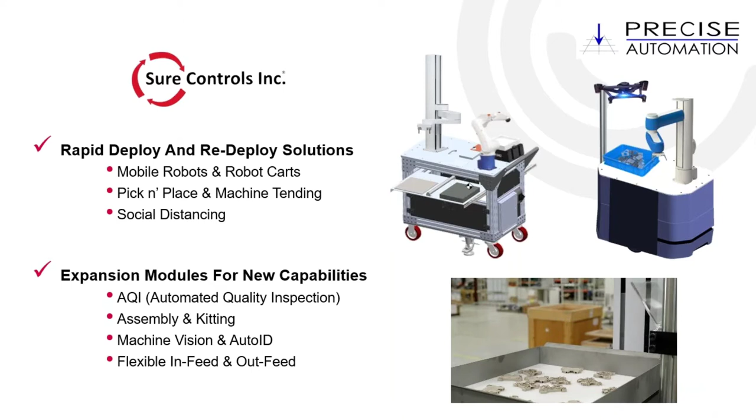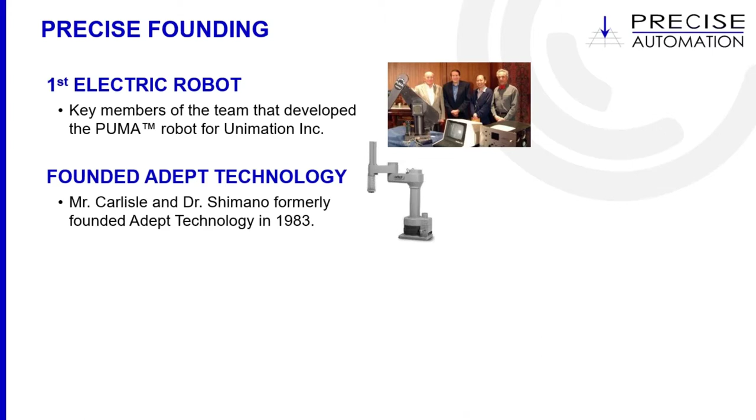They were out of Stanford University. After that project, the robot was sold to a company called Unimation, and the two gentlemen decided to continue to work together, founding a company called Adept Technology. Adept Technology set the benchmark of excellence for SCARA designed robots, high-speed SCARA with safety fences, mainly in assembly automation and big automotive plants and many different industries.

They sold that company back in 2015 to a company called Omron, and then they founded Precise Automation in 2004. Precise Automation is located in Fremont, California, right down the street from Tesla. The team's been together for over 20 years.

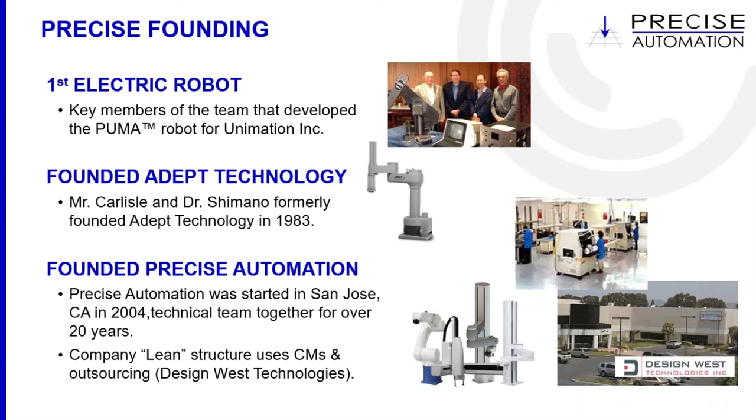It's a lean company. We're actually one of the few companies that manufacture robots within the United States. We do that through contract manufacturing with a defense contractor called Design West down in Tustin, California, in Orange County. This allows us to have pretty decent lead times on Cobots. Cobots is really the only robot technology we develop besides our motion controls. We do not develop industrial robots.

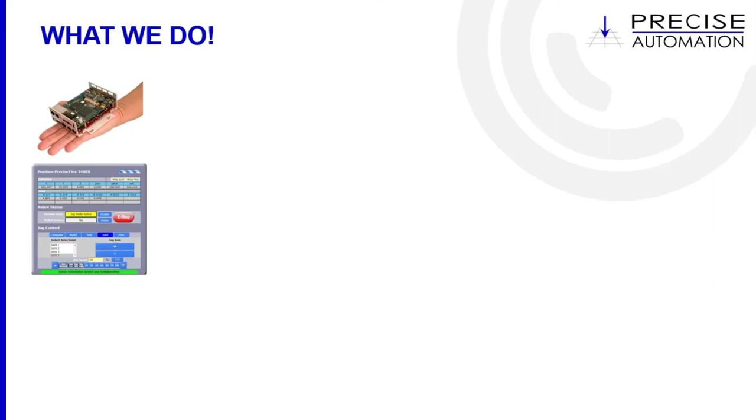Moving to what we basically do, the company started out with a controller design, a microcontroller design, very powerful, running on low voltages, that could power kinematics or precision machines by design. That's exactly what they did after having that design and software. They said, why don't we go ahead and develop a Cartesian type robot?

So we have the Precise Place 100 series of Cobot, in either an XZ or XYZ configuration. The controllers are embedded in them, so you don't have cables hanging out the back going to a big tower box and then into the power. Very clean and very easy to install, and they run off of 110 voltage. Those are primarily used in lane changing for conveyor systems and some simple pick and place applications for tabletops.

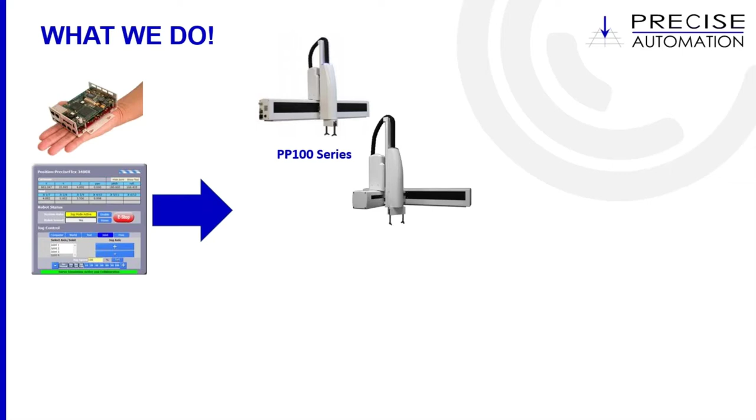We went ahead and designed this unique SCARA design robot with the PF400 and 3400 series. Both units can be placed on a collaborative rail that we offer in 1 meter, 1.5 meter, and 2 meter lengths. This is a unique design compared to other SCARA type robots. Traditional industrial SCARA designs have the Z stroke out in the front, limited most of the time to a 200 to 220 millimeter stroke. Our strokes are in the back, as you can see in these pictures, the two black lines on the back column. We offer this Cobot in 3 different lengths: 400 millimeters, 750 millimeters, and the tallest at 1160 millimeters. So these are very unique designs.

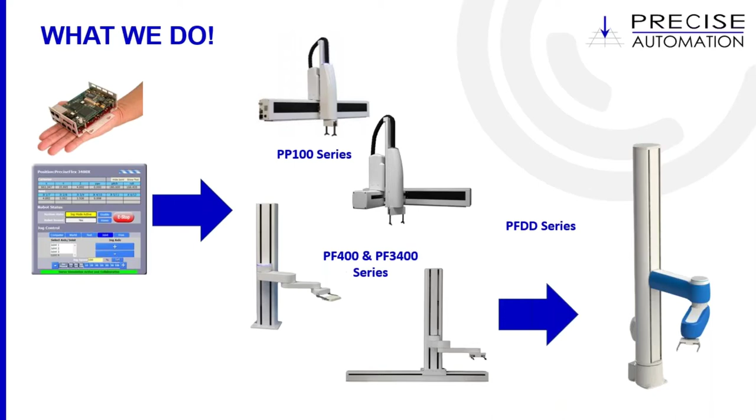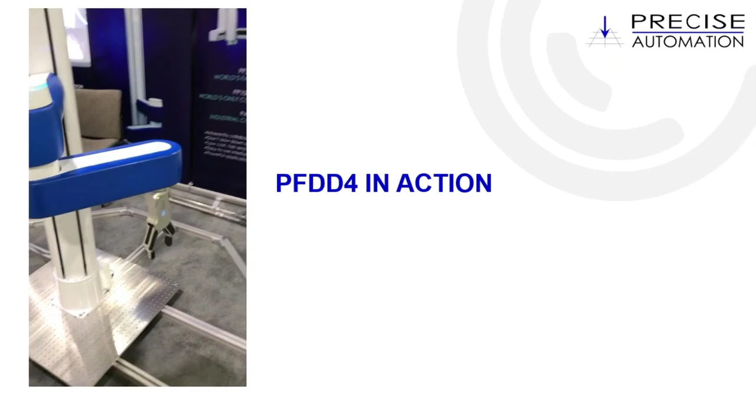We're going to get more into the applications with them, but our newest product about to be released is the Precise Flex Direct Drive Series Cobot. This incorporates design from traditional 6-axis Cobots as well as our SCARA design. Instead of a linear rail, we have a rotational base direct drive motor, and then a direct drive out on the elbow. You can see it here from a show we did earlier this year demonstrating this new Cobot, and it has a unique envelope.

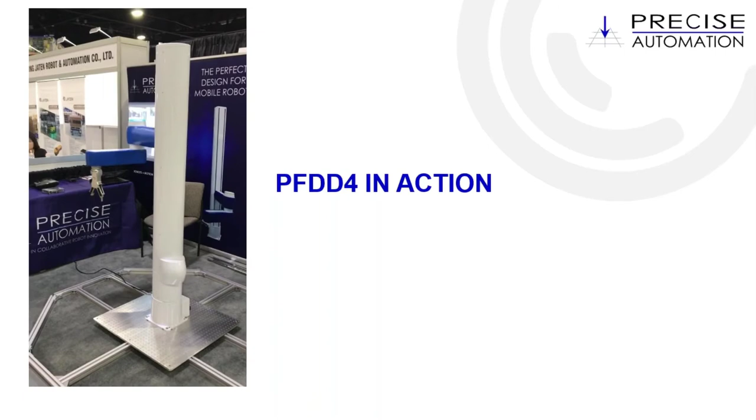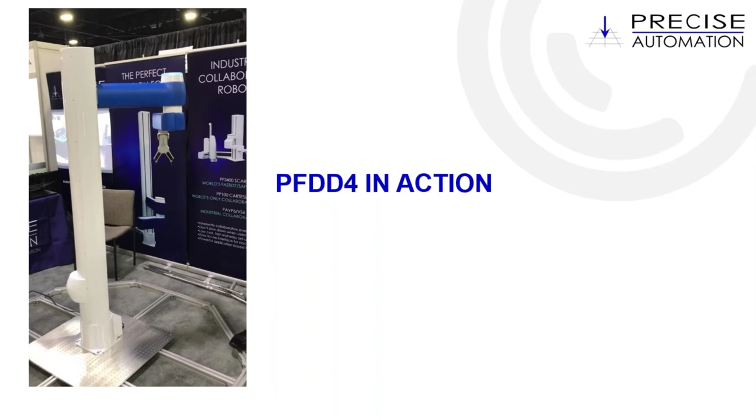This one is offered in a 500 millimeter Z stroke, a 1 meter Z stroke, and a 1460 millimeter Z stroke. It comes in either a 4-axis, which this one pictured is, with a gripper on the end — you could call that a 5th axis — and it's also offered in a 6-axis version. This unique design will be very good for machine tending applications or infeed/outfeed loading of conveyor systems.

One of the questions I get asked most frequently when I visit customers is, what is a collaborative robot? Some folks still don't truly understand the utilization and the definition of collaborative.

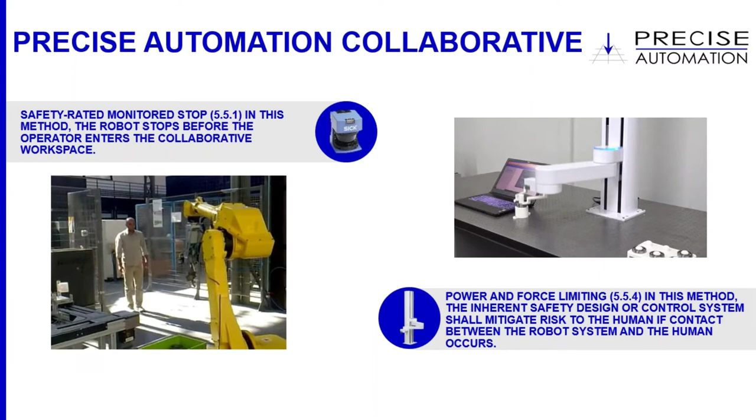If you look at this traditional design, it was first collaborative but actually utilizing an industrial grade robot that used a LiDAR area scanner. As the operator would walk towards the robot, it would slow down and then come to a complete stop. He would then do what he needed to do within the work area, and once he's done checking everything, he leaves the zone. As he leaves, the robot slowly comes back to working and goes back to what it was doing.

Now, I don't call this fully collaborative. I call this semi-collaborative, because the operator is not working with the Cobot at the same time.

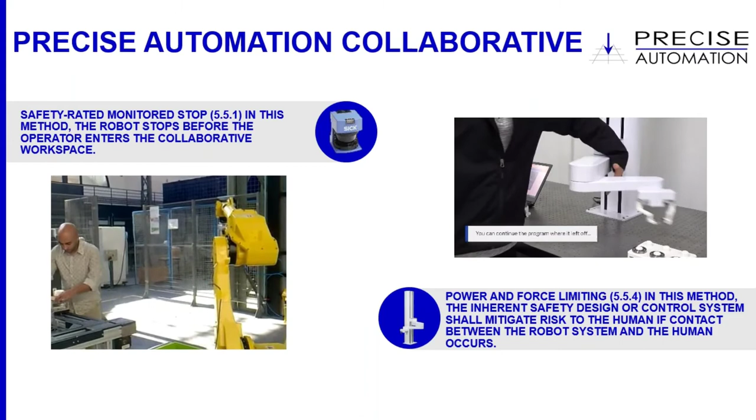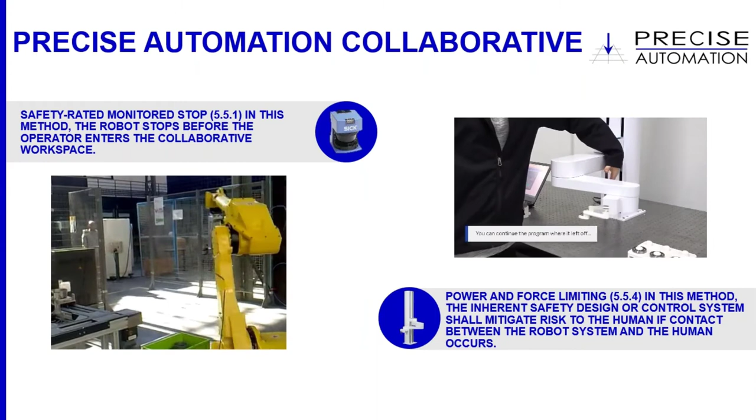So what we call collaborative is shown in the upper right here. You can see Dalton put his hand in between the pinch point, and it stops the Cobot, then the Cobot goes back to working and doing what it's doing. Our Cobots are all force limited, and they all follow the stringent guidelines set by the ISO safety standards.

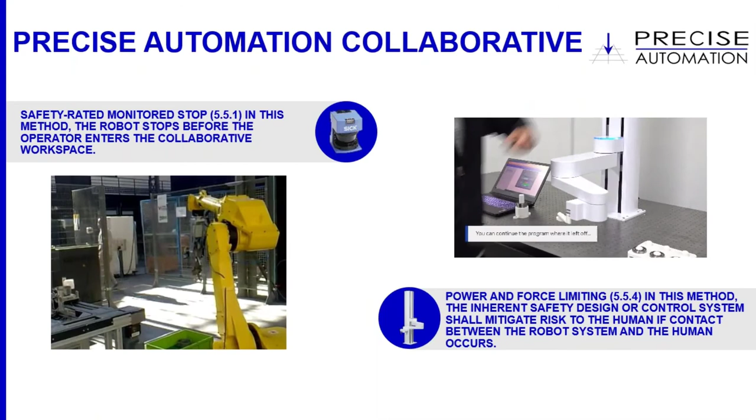With that, I'm going to hand it over to Dalton to talk about teaching.

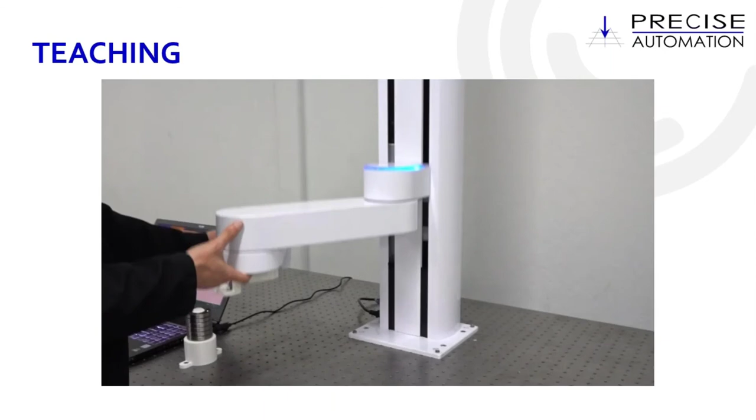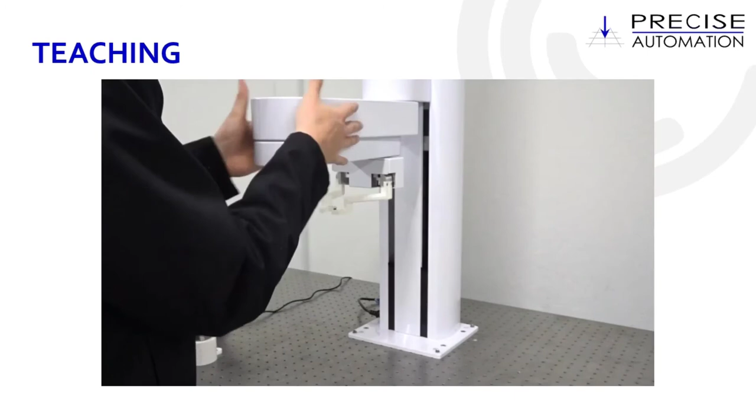Thanks, Darren. I'm going to talk about a unique feature for our line of robots, specifically the PF3400 seen here, and that's how easy it is to drive these things by hand and manually teach the positions. Unlike other industrial robots like Darren showed earlier, or other Cobots on the market, in our mechanical selection we don't actually use typical high friction, high gear ratio components like gearboxes and harmonic drives.

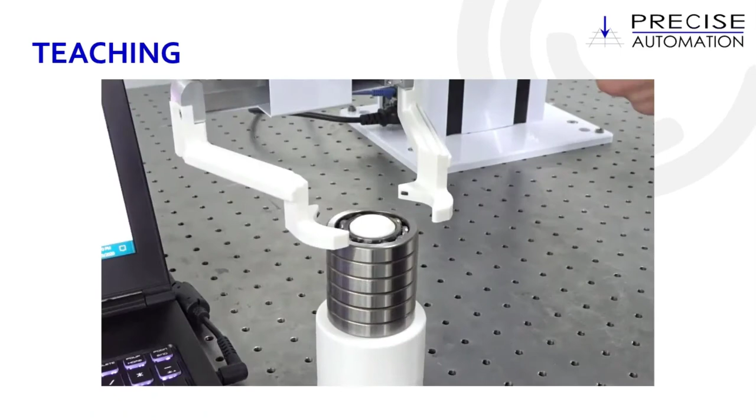This serves a few purposes for us. It produces a small reflected inertia, and mechanically what that allows us to do is be really sensitive with our current sensing technology, allowing us to detect collisions and make our robots more safe and sensitive to the outside world. It also allows us to move at the fastest collaborative speeds, at 1.5 meters per second.

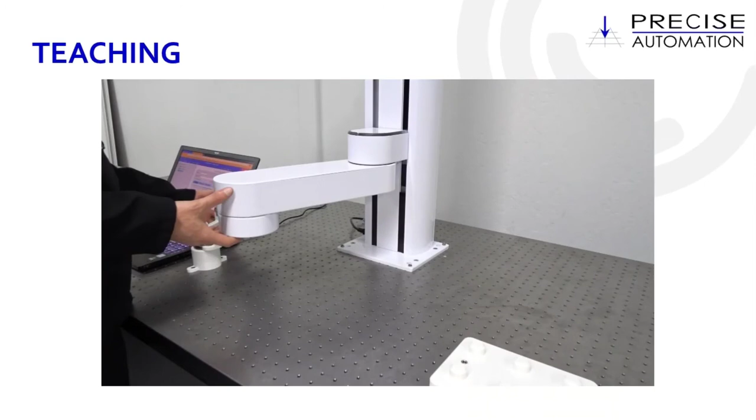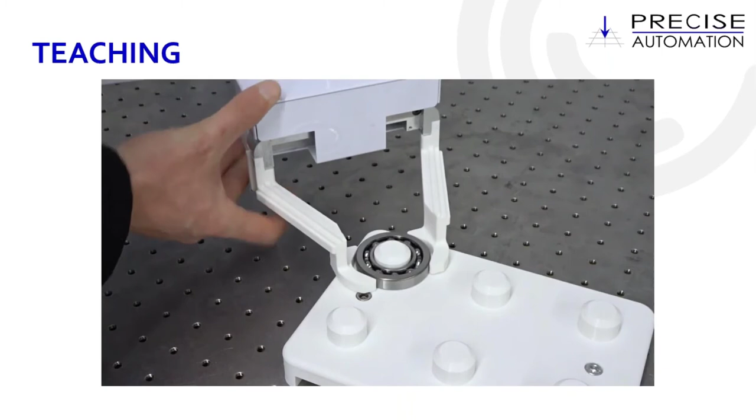What you're seeing me do here is use our graphical user interface Guidance Motion to simply click around a few times on the screen, teach a few positions, put the robot into free mode, move it to a specific location you want, and then with just a few more clicks, you can get a very simple pick and place application up and running in no time.

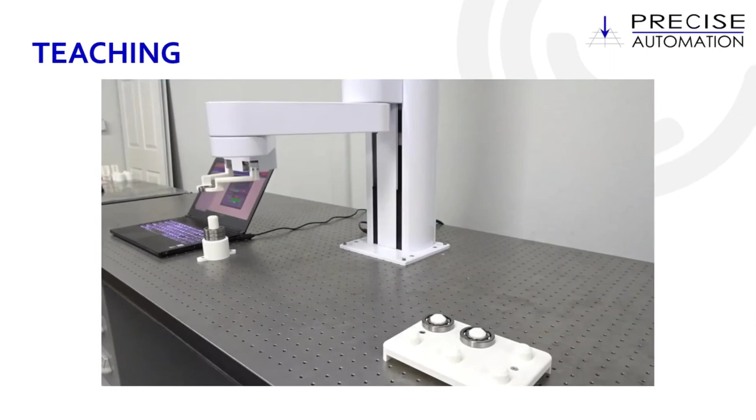We have a fully integrated 48-volt motor supply, which for typical use with these robots means they consume less than 200 watts on average operation. So they're really lean and really green, really nice.

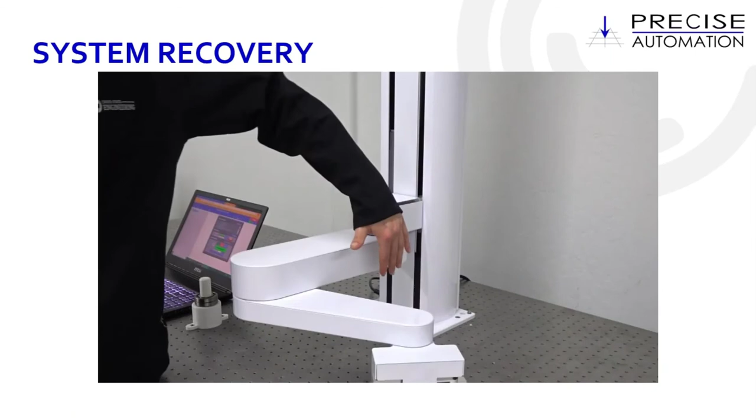Next video, please. Another unique feature we like to demonstrate is the power of our error recovery and the low collision forces of our Cobots. It's what makes us uniquely collaborative, and we always opt to show this famous pinch point demonstration. With other systems, you're going to get alarms raised on the factory floor, downtime in the work cell, and more importantly, an injured operator.

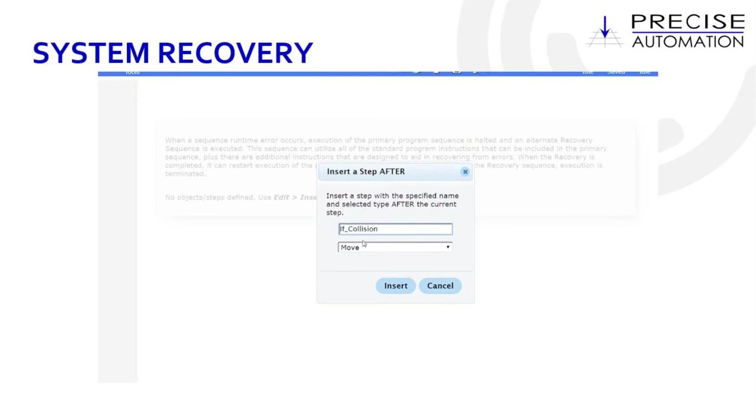But with our error recovery system, simply through guidance motion as seen here, we can allow for obstacle avoidance, jammed parts, as well as missing parts, and get the robot to recover from these errors and continue execution of the application with no attendance needed in the work cell. All of our collision testing has been performed and certified by TUV, and all of our collision speeds and forces are provided in our hardware reference manuals published for your reference.

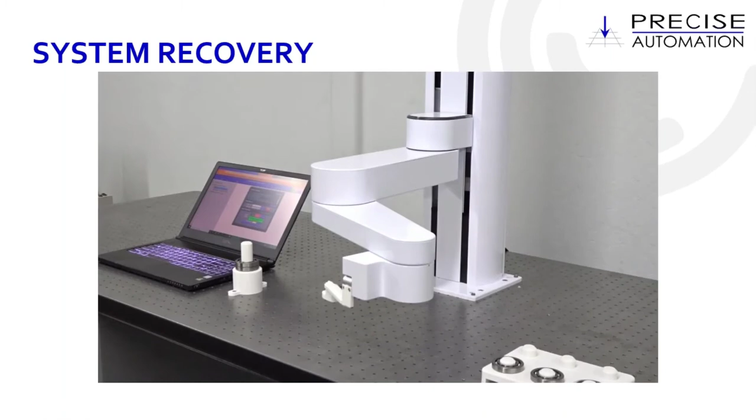So what you're seeing here is just one type of collision in the work cell. It's going to make a few checks and go back to doing what it was doing.

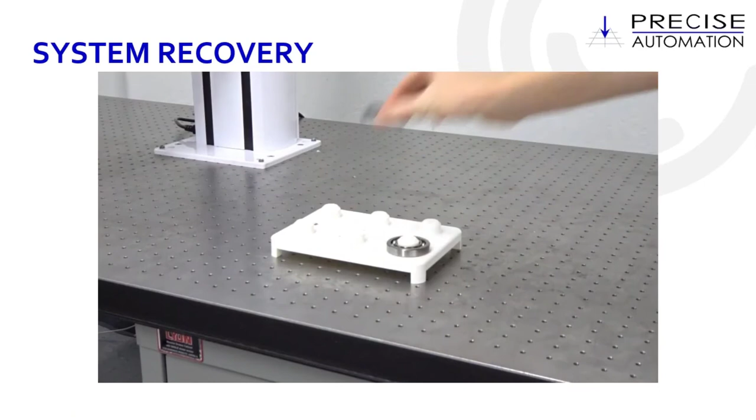Inconsistent part presentation might be an issue for some assembly lines in-feed or out-feed, but you can see here with an already existing recovery routine, we can add in a part presentation system check, and then the robot will continually look for that part.

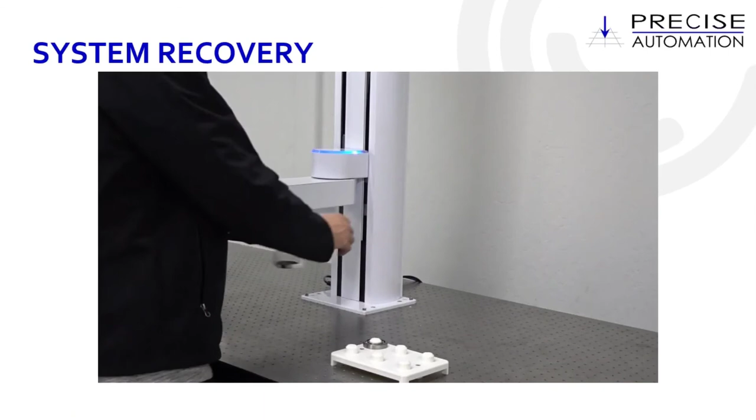And then lastly, here is another example showing an operator perhaps in the work cell, and if some type of collision happens, we can give the Cobot or the operator some time to go ahead and manually adjust the Cobot, put it into a position to avoid, say, some other expensive hardware components, and then the robot will get back to doing what it was doing.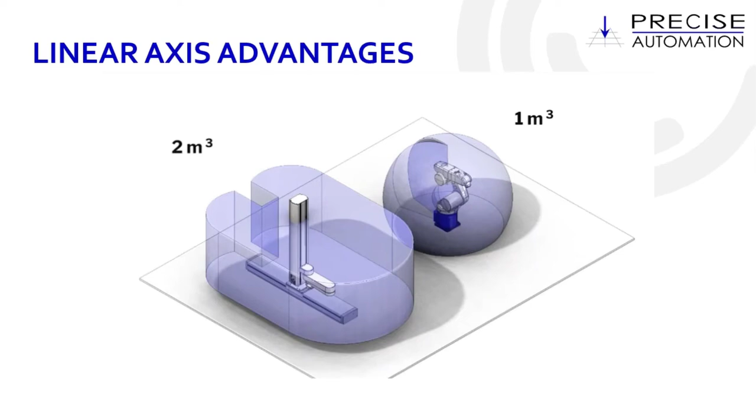And lastly, one thing we like to talk about is the advantages for maybe an additional axis, or we call the linear axis. And so we always show this visualization here of the traditional 6-axis work envelope. It's spherical. And you see our PF3400 with its work envelope, it's cylindrical. Now let's take that a step further, put it on a linear rail. We can effectively double that effective work cell space.

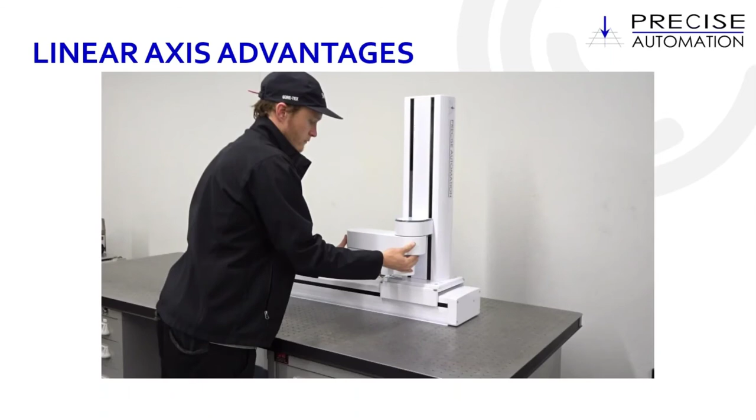And what you're seeing me do here is simply plugging and playing with the 3400 PreciseFlex onto the linear rail. So I plug in a few cables and it's that simple. It's a master and slave topology from the controllers, so it easily integrates as an additional axis. And what you're seeing here is just an example of a storage retrieval system.

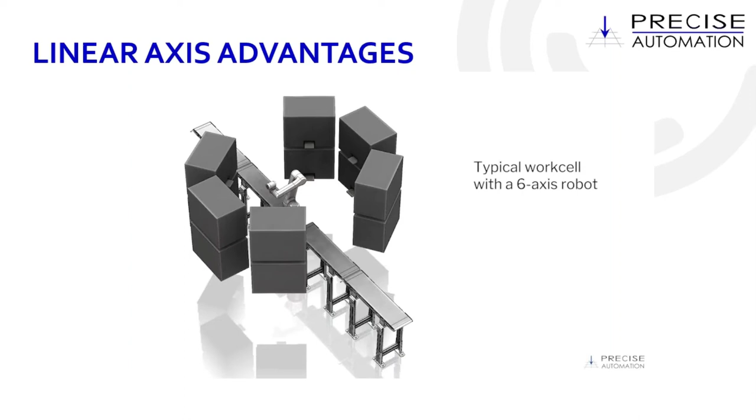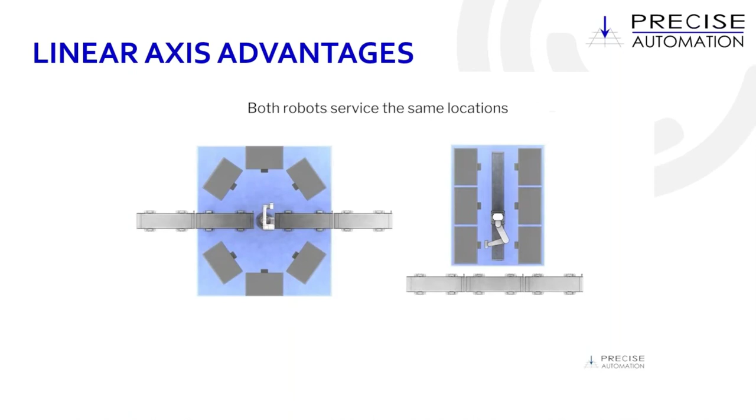And that's where this linear rail really shines, is being able to go through a lot of factory space or lab space and effectively use all that space while not taking up other needed space for, say, operators or other hardware. And what you're going to see on the screen now is just some data and some talking points of how our unique work cell design is more effective, or how you might think about it a little differently when designing your cell on the factory floor.

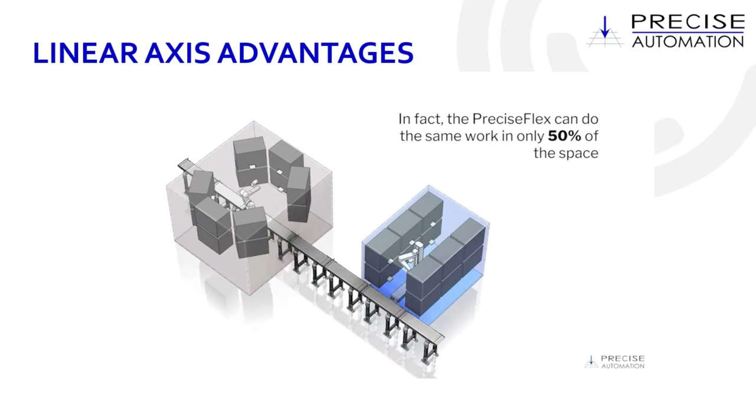Essentially, with the traditional spherical working envelope, you might be able to access a wide area, but maybe not the entire volume efficiently. But with our rail and our work envelope, end users and integrators can save factory or lab space. You can access all heights at all points of the work cell. And with that being said, I'll pass it back over to Darren. He's going to talk about some applications.

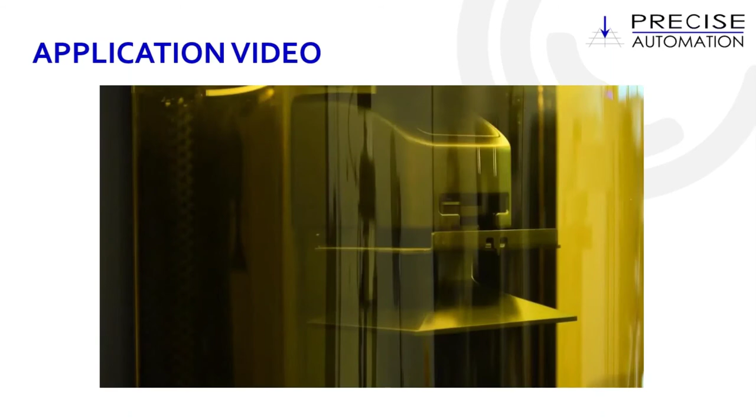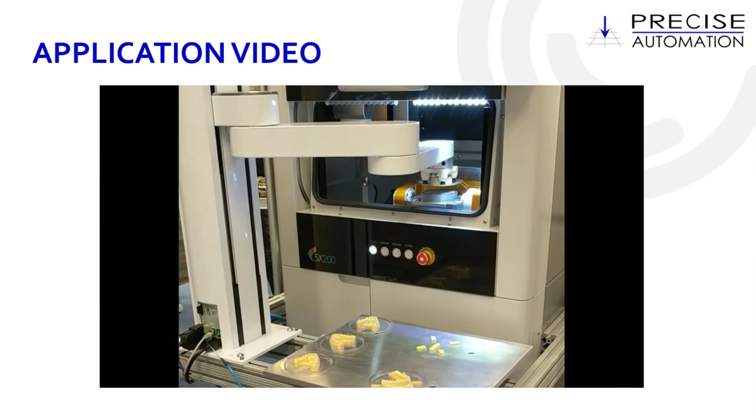Hey, thanks very much, Dalton. Well said. Actually, to build off of your linear application, look at this one right here. This is a company called Carbon 3D. It's actually a collaborative SCARA on a rail there, tending 5 different machines. So a very good application of that utilization. This is a SCARA tending some dental milling parts just in and out of the machine.

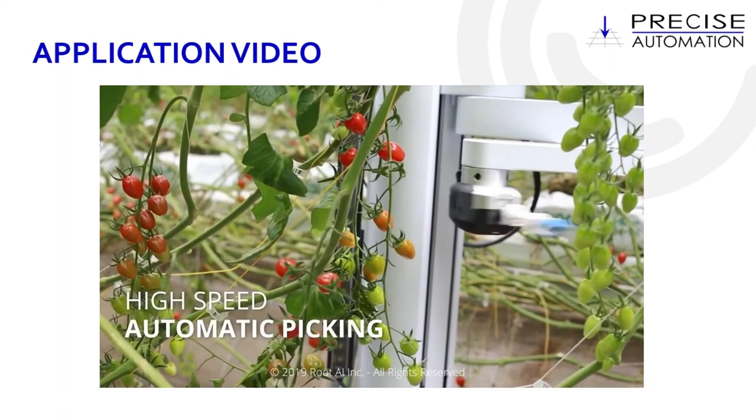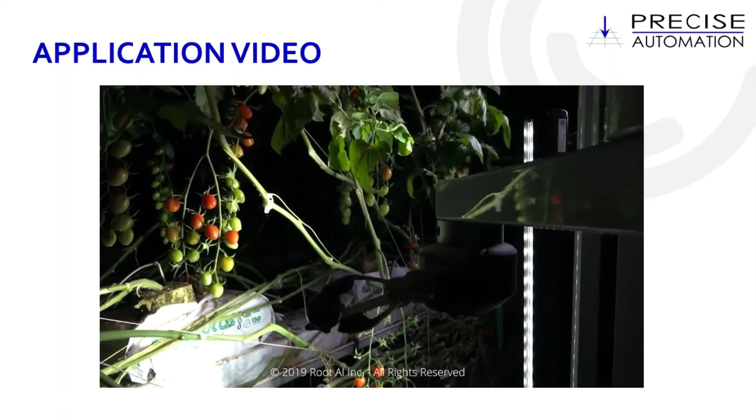This is a pretty exotic application of tomato picking using multiple cameras and vision, a little bit of AI, and then a custom gripper to grab the tomatoes. So it's on a mobile platform. It's a pretty one-of-a-kind type system.

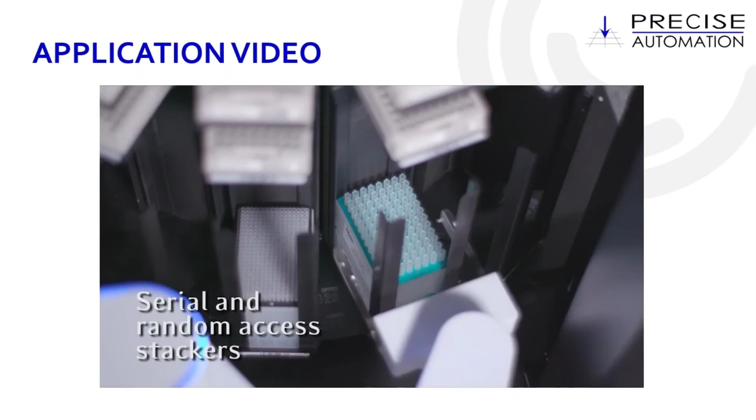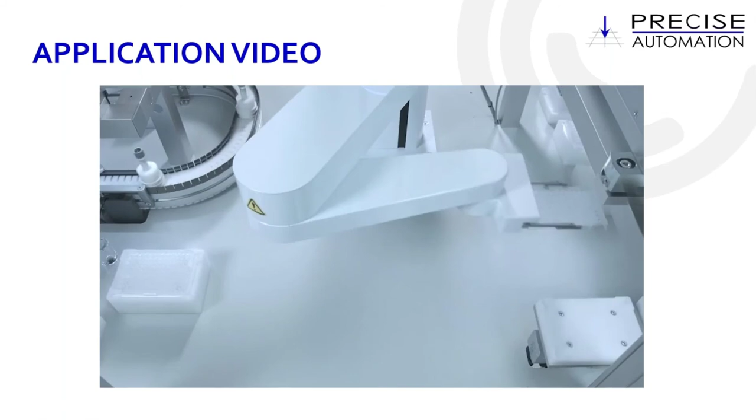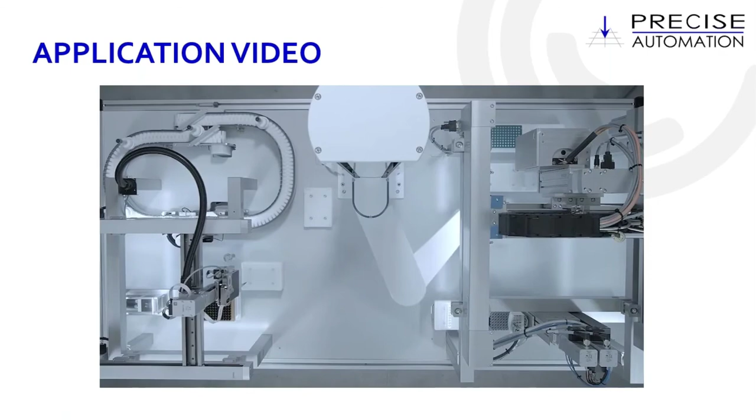Now, for Precise Automation, we're very big into this type of an application, which is microtiter plate management in the life sciences, lab sciences arena. We've been very busy with the pandemic. Companies utilize this machine mainly because of the geometry of the cylindrical envelope there. You're able to really work the workspace at different levels, where a 6-axis robot would get into some trouble at the lower point and the upper point of its range.

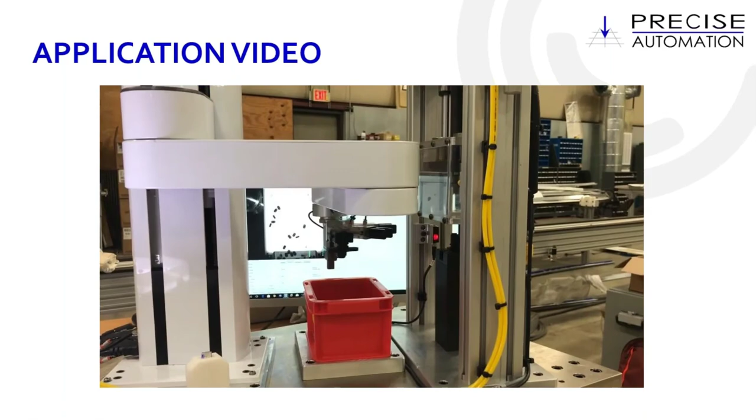This is another application where it's actually doing multiple tasks using a flexible feeder, like what Bert was talking about earlier. And you don't see all safety fences around this thing. Here's another one working side by side in automotive with a customer. A repetitive task that they had was placement of this magnet. It seems like a very small task, but that's what they wanted to have a robot do. Just go ahead and place that while the person's doing something else.

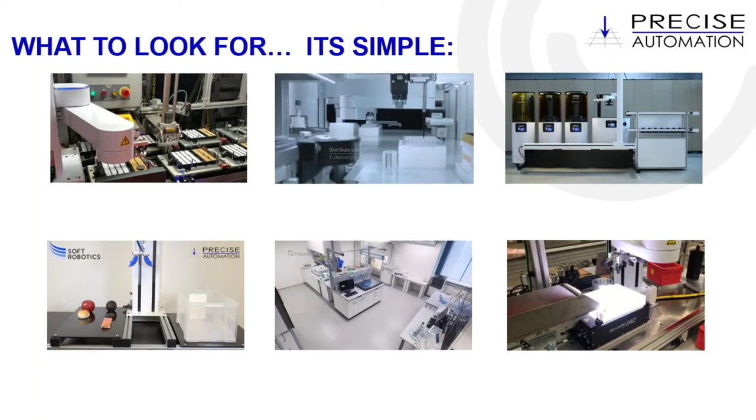So what do we look for when we go out into manufacturing facilities? For those of you watching this presentation, we want you to contact Sure Controls and they'll come out and take a look at what you're trying to automate. What we look for, and this is actually a customer for Sure Controls with that same magnet placement, is that person who's doing repetitive work.

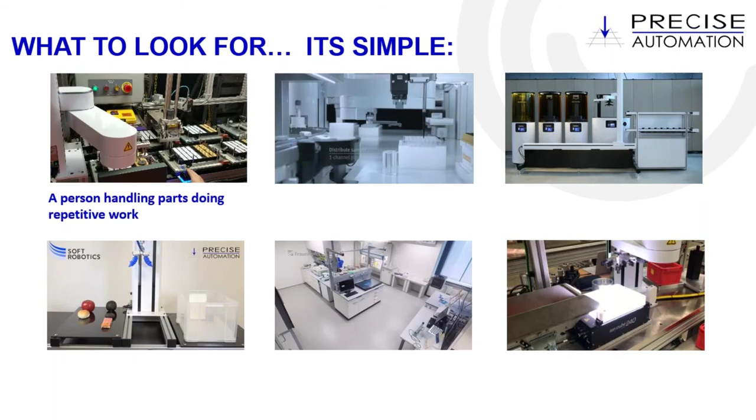We're not looking to replace industrial robots that are going at high speed, because that's the biggest difference: a cobot is not trying to replace that. And if it went at the same speeds as the industrial robots that are all guarded, then it wouldn't be safe anymore.

There are certain speeds that you can go and produce a certain amount of force that's allowable under the ISO standard. So we look for somebody doing repetitive work. We look for that small work area that we can utilize, basically. And Dalton talked about how we maximize that smaller footprint. We look for payloads under 7 kilograms.

If we go above 7 kilograms, we start getting into that area where the load itself is no longer collaborative. It's really dependent upon the custom end of arm tooling, whether it can hold that weight, and then start moving it around like that. You can run into trouble in your risk assessment. We look for 3 seconds or longer. It's funny, a lot of industrials are looking for 3 seconds or faster. We're not trying to do 60 parts a minute here. It's a totally different apples to oranges comparison when you're looking at industrial high-speed operations and collaborative operations.

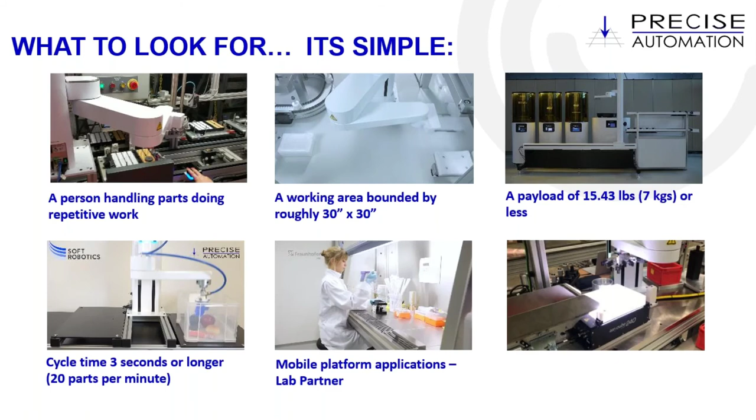We put ours on mobile platforms. This is fast becoming a very hot product here. This is like a lab partner scenario where our system lends itself to the mobile platform in that we don't tether a big controller. Ours are embedded into the cobot. So you can see in this picture right here, there's not a lot of cabling all over the place. It's pretty streamlined. It's on a nice platform, has a camera attached. It's actually going to take a picture of that and then grab that microtiter plate.

And then we do look for applications to replace an operator, not an existing industrial robot. So most of the people that are used to robots and have the industrial ones, it's very important to tell them, look, we're not trying to replace that. What we're trying to do is have you redefine your production flows, redefine your right sizing of facilities and your process development.

So a closing summary of key features and benefits for Precise Automation cobots is our embedded controllers. That's a big one. The ability to have that embedded into the cobot eliminates the bulkiness of a tethered controller box. Unique geometry: Dalton discussed the cylindrical work envelope versus a spherical work envelope on the 6-axis in the marketplace. Now that's a big difference between us and them, is that the majority of the cobots in the marketplace are all 6-axis.

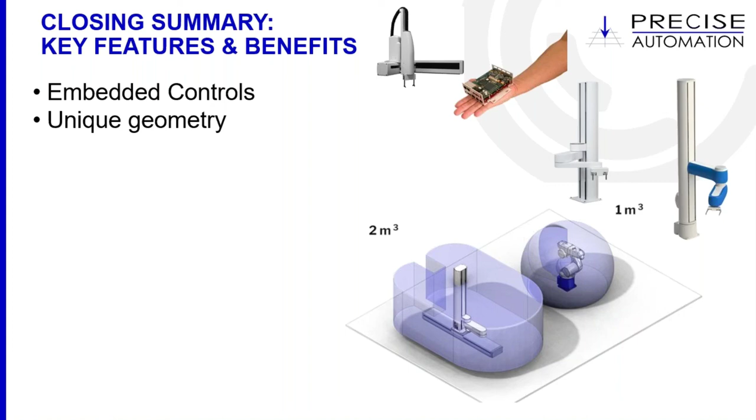So this is very relevant when you come to discussing reachability. You know, every application has the right robot for the job, and so in certain applications, we're just going to cover more ground. We have the only collaborative Cartesian cobot I mentioned, and the collaborative linear rail. Those are big pluses to make your system completely collaborative.

Fastest speeds in the industry, 1.5 meters a second, as Dalton has mentioned. A lot of our competition can only go half that speed, and then, to go a little bit faster, they'll employ an area scanner. And that, in my opinion, goes back to that whole scenario of semi-collaborative, when you start using LiDAR sensors and scanners with the collaborative robot.

Low incremental cost, being able to deploy and redeploy, as Bert had mentioned, that's very key in this industry. If I chose automotive as a topic: automotive production lines are multi-million dollars, and they're very inflexible. If you make a bad design there and you have a bottleneck and you have to figure out you need about 3 or 4 more robots on this line, that's going to be very difficult to retool and change, and you have to affect many aspects of the line.

With cobots, what's nice is you can develop new processes, you can prototype, you can do whatever it is you need to do that you're manually doing today in a plant, and then once you're done with that project, move on to the next one and redeploy the cobot, and do that at a very low incremental cost. So we're very flexible. I kind of mentioned that in that last answer.

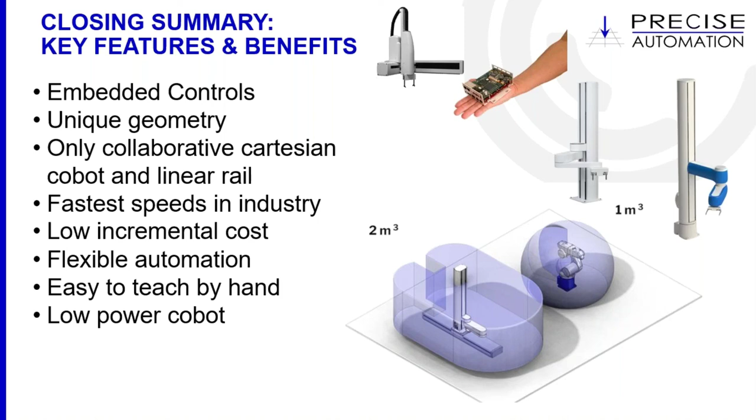Easy to teach by hand. Dalton demonstrated this in the video there. And as he mentioned, a low 48 volt, 200 watt cobot, which is better on the pocketbook when it comes to power consumption, and makes it a green cobot.